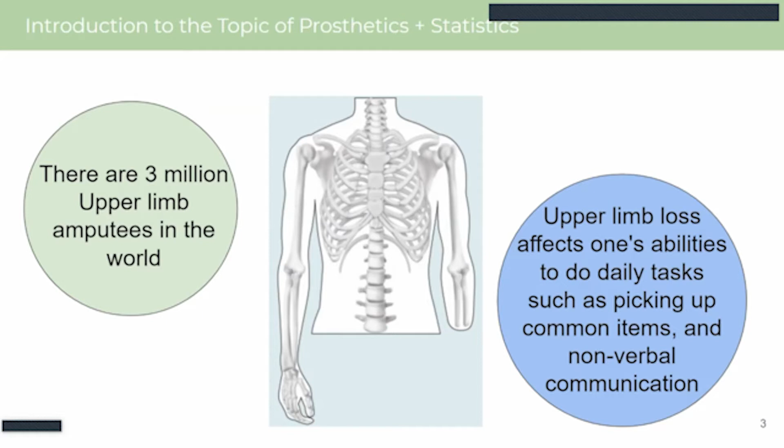Now, as an introduction to the topic of prosthetics, there are 3 million people in the entire world that face some kind of upper limb loss. And upper limb loss can affect one's abilities to do daily tasks that we all take for granted, such as picking up common items or nonverbal communication. Companies have taken the initiative to create prosthetic arms in order to mitigate that issue. But our team concluded that the arms in the market right now can be inaccessible due to their really high price point.

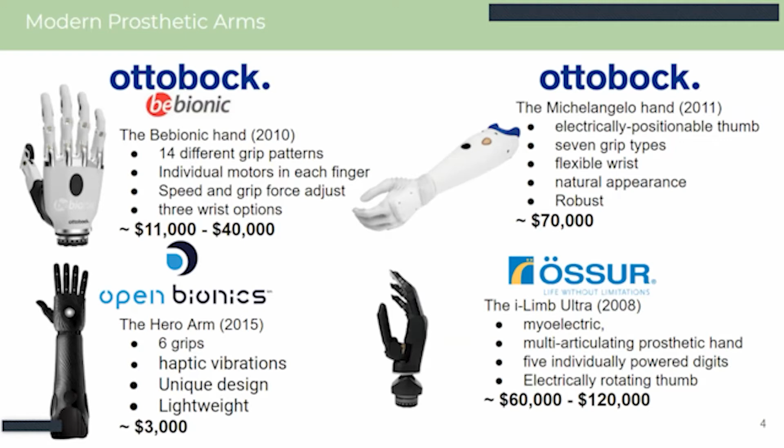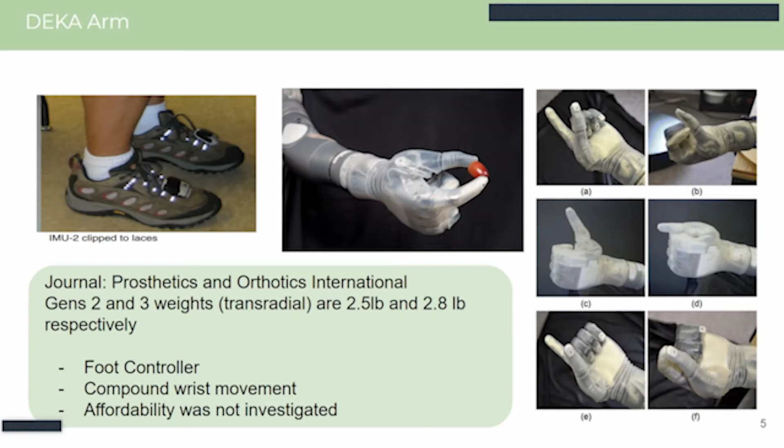This is where we poured all of our research into several prosthetic arm technologies. The DEKA arm was the first arm we looked into. It was published in the Journal of Prosthetics and Orthotics International, and it featured both a foot controller and compound wrist movement. Unfortunately, affordability was not investigated, and our team valued affordability.

This is where we researched the Cyborg Beast. This study was published in BMC Research Notes, and it only cost around $50. Most, if not all, of the hand was also 3D printed. One big limitation, though, was that it had limited movement because it was a purely mechanical arm, and we wanted our arm to do more than just open and close its hand. That was all it could do.

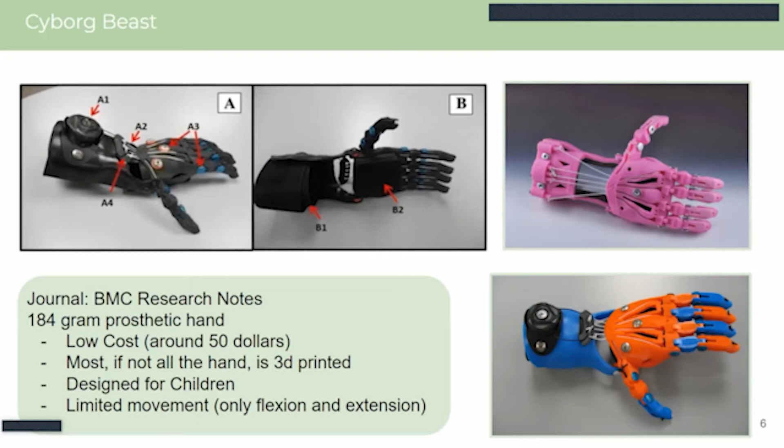Based on the research of our previous cohorts on MataPro 1 and MataPro 2, the fingers were actuated based on shape memory alloy wires. And based on the research for MataPro 1, the thermal conditions actually melted the 3D printed parts. So MataPro 2 refined the design by adding a carbon fiber skin as well as a cooling system. Both of their research was successfully published in journals, and we plan on pursuing our research and placing it in a journal to have it published.

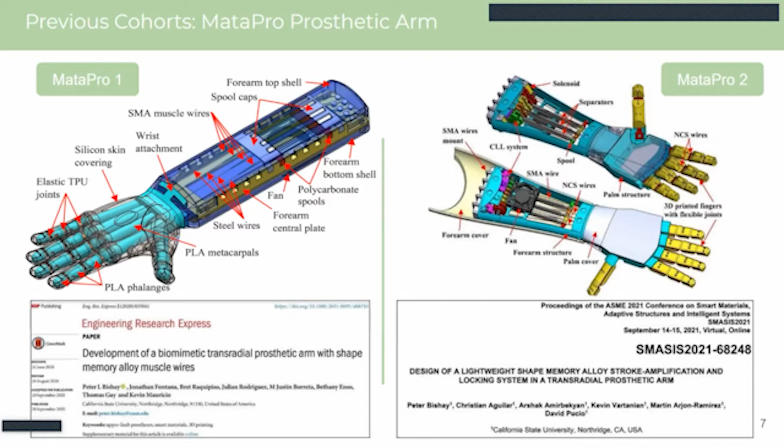One of our last arms is the MyOwn project, which is the last arm we were inspired by. It was able to successfully pick up items using the myoelectric control system, but the limitations it had were that there was no haptic feedback system, there's no wrist rotation, and the myoelectric control system had more limitations than initially thought.

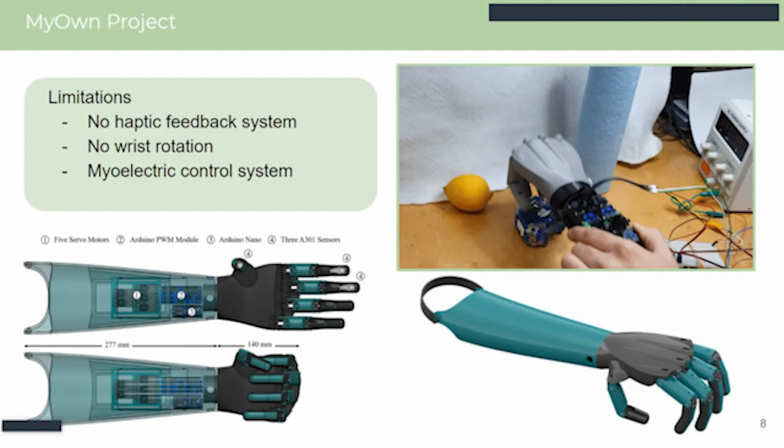The main limitation for myoelectric sensors was that there was muscle fatigue, because the muscles are interlaced and it made it hard to interpret signals, and one or two muscle groups were being constantly activated, which just gave the user pain. We've considered voice activation, but not everyone is comfortable talking to the prosthetic arm at all times in all environments. And we've considered brainwaves, but the concentration needed to use brainwaves was too much, to the point where it would render the arm unusable.

And our main problem was that functional robotic arms in the market are expensive. So we're trying to create an arm that not only had multiple functionalities, but was also cost effective and lightweight. And this is where our design objectives come into play. We wanted to create a foot control system whose components would communicate with the arm wirelessly to control it. There would be a mechanism to rotate the wrist, and haptic feedback would also be implemented so that users can have a sense of touch.

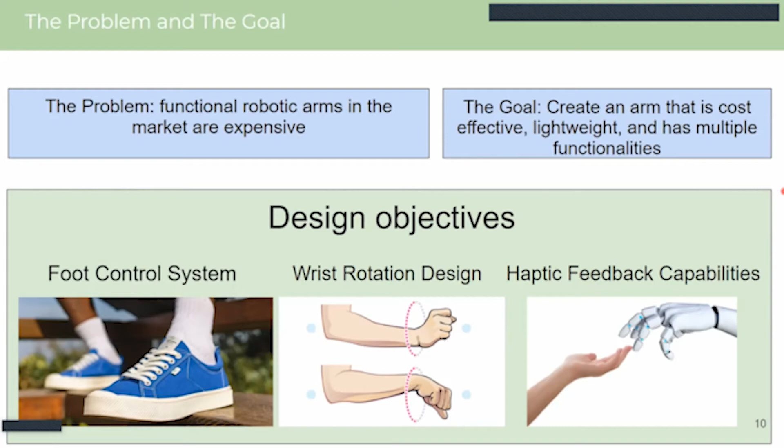This is how our team was split up. We have our wrist rotation team, which was responsible for designing the wrist rotation mechanism. We have tactile feedback, which was responsible for making the haptic feedback capabilities of the arm. And the foot controls team was responsible for designing both the controls as well as the overall design of the foot controller.

We have 4 milestones that we went through throughout the entire year, where we did a PDR around December 2nd. We did the CSUNposium presentation around last month. This senior design project showcase was also a milestone. And at the end of the semester, we are going to complete a research paper and submit it to a journal so that it can be published.

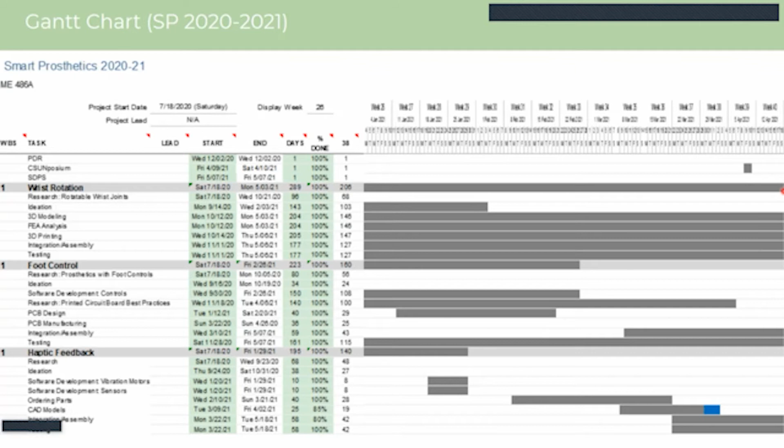In order to achieve those milestones, our Gantt chart showcases all of the tasks we needed to do to complete both the milestones as well as the project itself. Right now, it only displays several weeks, but the entire Gantt chart shows the entire schedule when you change the display week.

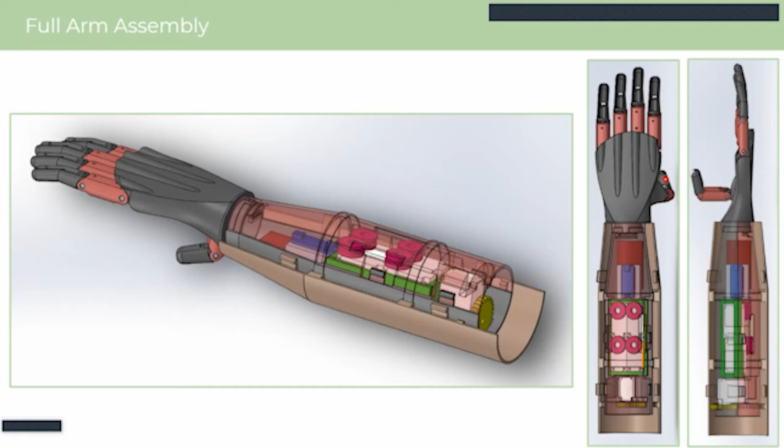All right, so here we're looking at the full assembly of our 2021 Smart Prosthetic Transradial Prosthesis. The arm is comprised of a palm, 5 fingers, and the forearm. The forearm houses much of the system assembly, including the smart servo motors. Those will be controlling the activation in the fingers, as well as an inner shell design, which will allow for the wrist rotation.

Specifically, the palm itself has a curved shape, better for picking up rounded objects. The fingers are made up of a 2-joint mechanism and a slight curvature in the top portion of the finger to allow for a better grip structure. They are held together with an X-frame finger mount. These are easy to assemble and print. And then on the back side of the fingers, we have a removable access nail. This will allow us to thread and wire the things that we need to actuate each of the fingers.

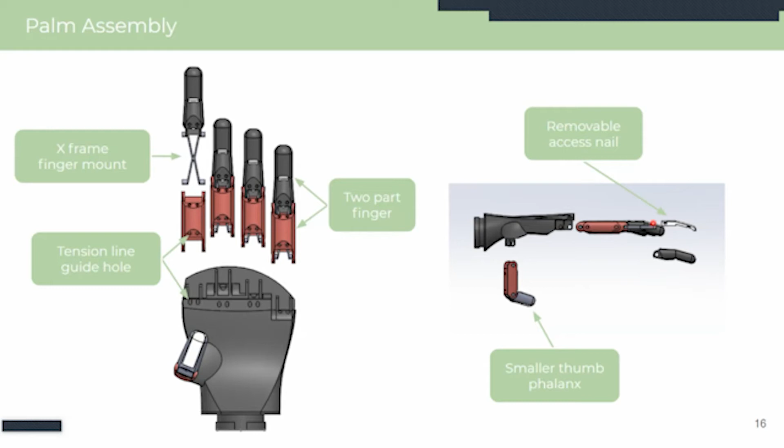So we ran threaded fishing line from the smart servo motors in the forearm up through the fingers and then back down to the servo motors to actuate each of the fingers. And then we have elastic bands sitting on the back side of the fingers to retract the fingers after an activation. Also, each of the fingertips will have a pressure sensor built in, and I'll talk more about that in haptic feedback.

Here we have the forearm design. This is where we've mounted much of the assembly, including the smart servo motors made by Herculex. These motors were chosen because of their reliable accuracy and their strength. At 7.4 volts, we can obtain about 10 pound-force inches. We have 4 of them to actuate each of the fingers. One motor will be there to actuate both the pinky and the ring finger, while each of the other motors will have their own individual finger.

We tied this into the Arduino Nano. We chose the Arduino Nano because of its size and familiar programming. It also comes with a lot of reliable parts and libraries, so it was easy to work with. It's powered by a 7.4 volt LiPo battery. This is essentially just an RC car battery. It's easy to find and purchase, so it's simple to replace.

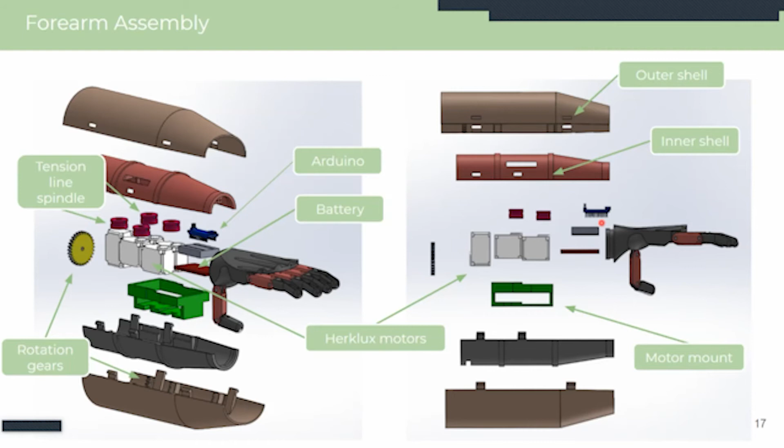We have a 5th servo motor in the back of the arm to rotate the shells around each other. It does that using the rotational gear. It has a normal gear and an inverted gear mounted to the outer shell, which will allow for rotation. Just a quick note, the battery can power the arm for about 30 minutes.

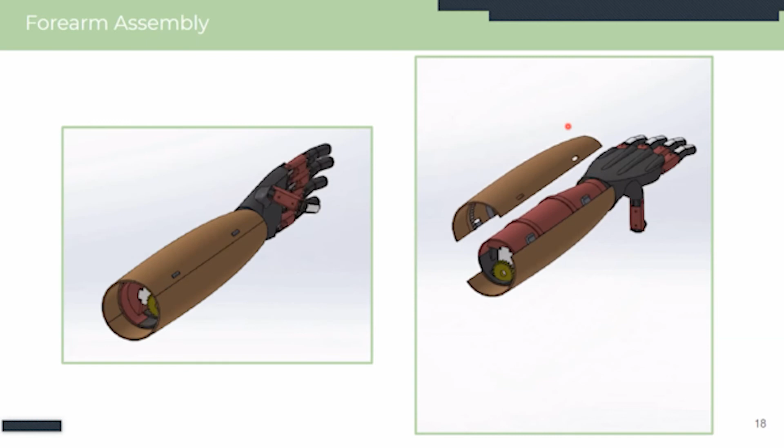So here we have some visualization of the arm rotation and the assembly. All of the components will be rotating together inside the arm to alleviate constraint or entanglement. And then the outer shell will be mounted to the residual limb and will be stationary.

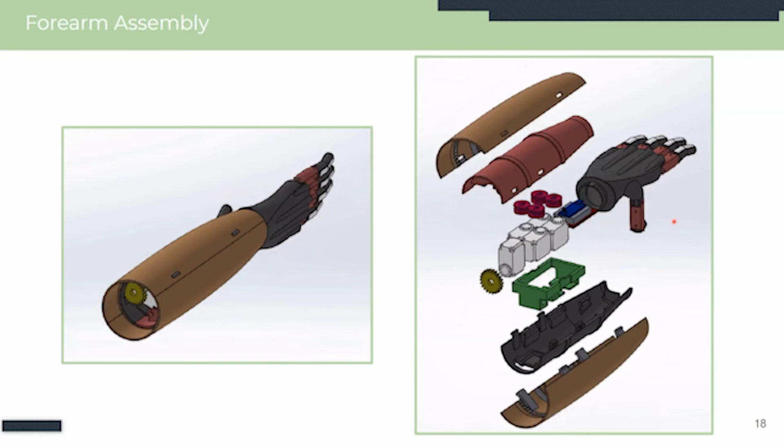Also mounted to the residual limb, we have the haptic feedback system. This is a system that will allow users touch sensation when utilizing the arm. This is beneficial for performing actions without looking or just unable to see, as well as just a quality of life improvement for amputees. We have also been able to utilize the sensors in the fingertips to adjust control in the finger activation to prevent too little or too much movement with the finger activation.

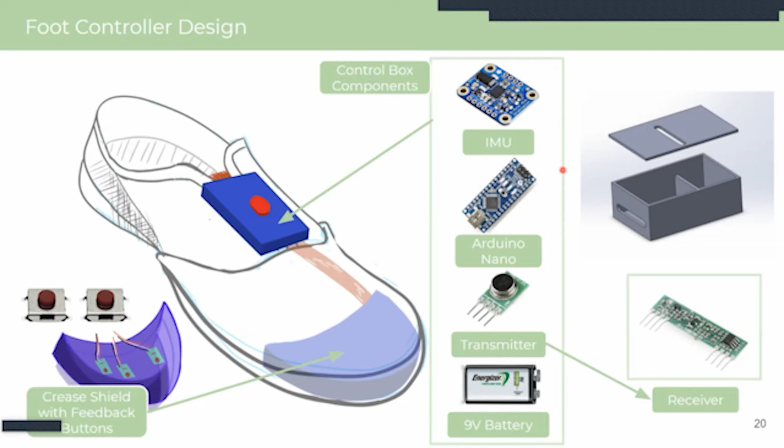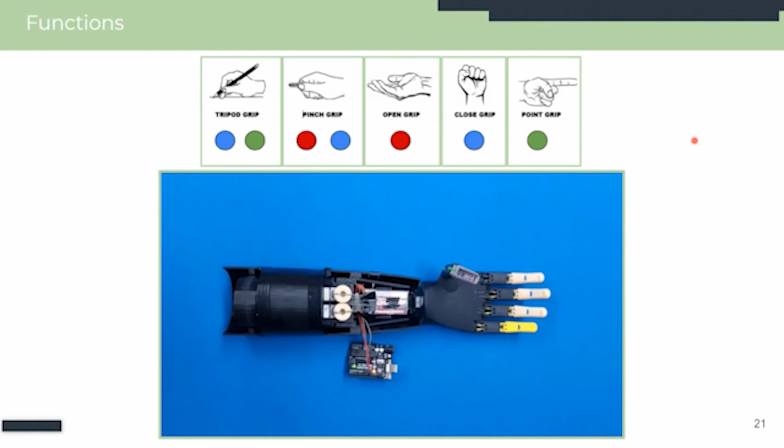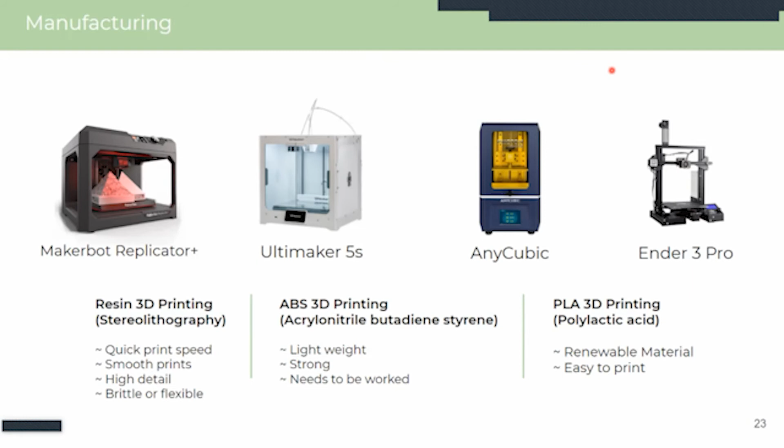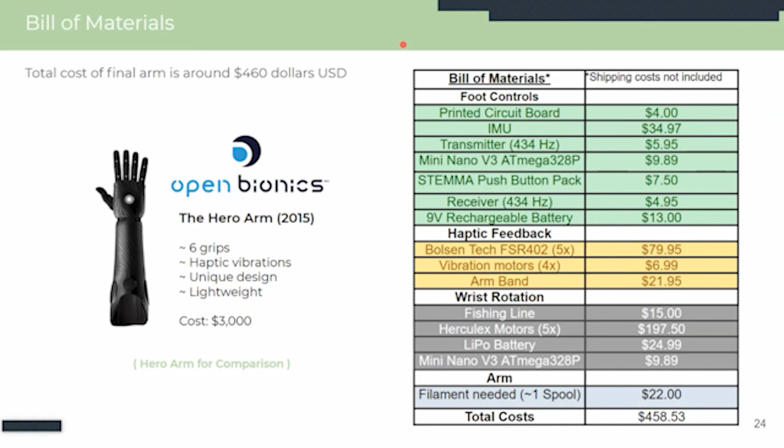So our total budget for this project was $1,700, and we were able to build an arm that cost $460, which compared to the most comparable arm on the market, that one will cost $3,000. So we're well under the line for the market. In conclusion, the 2021 Smart Prosthetics has created a transradial prosthesis that features haptic feedback, wrist rotation, and is controlled using the foot. Thank you.

I have a question. So one of the goals was to be cost effective, which you demonstrated from a parts standpoint and a manufacturing standpoint, but there's a lot more that goes into making a prosthetic available for everyday patients. So there's a lot of regulatory and compliance that gets added on. And working at Medtronic, I see that every day. So the real cost is missing some of those components, which is probably why the competitor costs $3,000. There might be $1,000 more in compliance and regulatory and some of the other things in running a business. So that's just some feedback.

My question is, what feedback have you gotten from actual patients, or do you have access to have somebody that is under this condition actually test out the arm? We don't necessarily have an amputee to test out what we're researching. The closest thing that we have is research that our previous cohorts have done. They did a survey with amputees asking them what they would like about arms. They mostly stated some sensory, which is what we've incorporated with haptic feedback, and the price point. But beyond that, this was mainly just to have wrist rotation, foot controls, and the feedback system implemented.